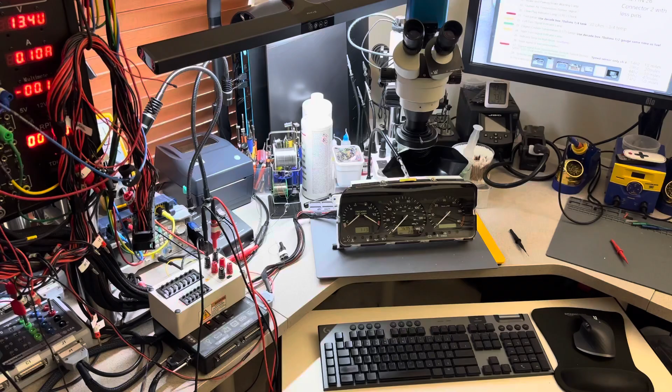All right, this is a private video for you, Lee. Again, I've been testing your instrument cluster for a few hours, since I have other things to do. I'm using the other simulator, but I don't find anything wrong with it. Let me just show you.

I have the battery connected. I'm going to turn the ignition on. I have signals already applied to it, so you will see RPM, speed, and so on. But yeah, as you can see, everything is working good. I don't see anything wrong with anything.

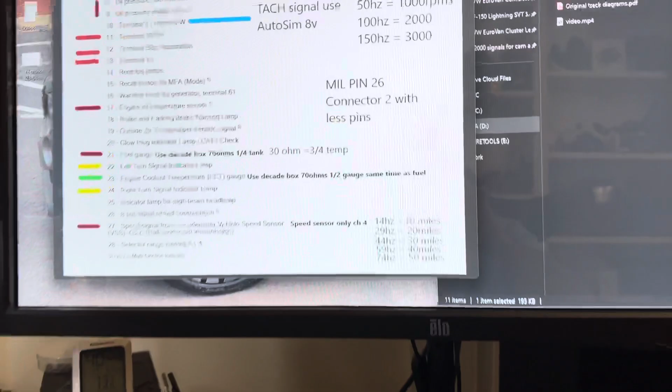I can change the speed, and one thing that I want to show you is all my signals. Just get rid of some in here. Yeah, perfect. So you can see right there the hertz that I give, that changes into mileage. So let's say right now I'm providing around 59 hertz, and that is around 40 miles an hour. So calibration wise, that is perfect. And I've been checking different speeds and it's good.

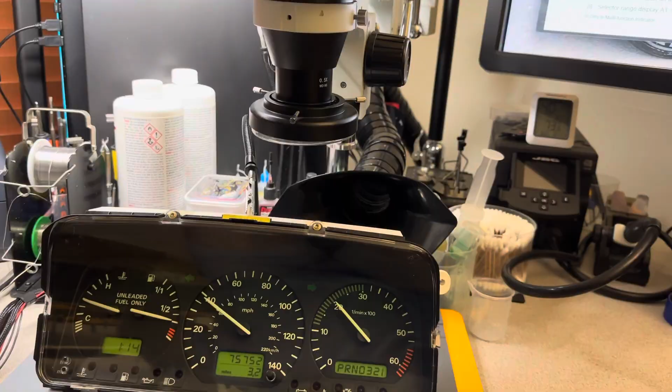Same thing goes for hertz on the RPM. So 50 hertz is 1,000, 100 hertz is 2,000, and so on, right? So I'm right now at 2,000 RPMs. And if we see here, the other tool that I'm using, I'm at 100 hertz. So that is matching the specification. So if I go over to 50, which is 1,000 RPMs, we can see that that is indeed perfect. So again, no problem with the signals.

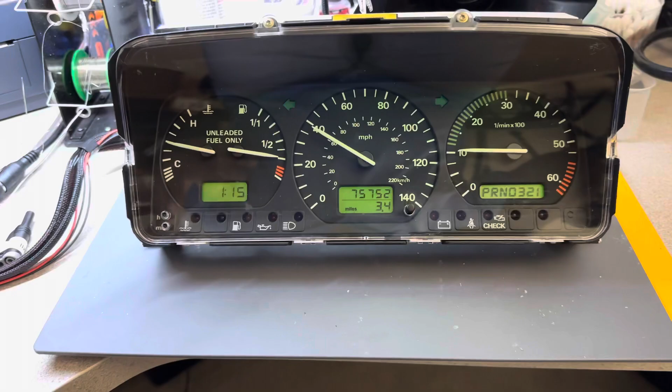I'm going to go down to idle. Idle, like lower RPMs and lower miles per hour, which in this case, the lowest I can go is 14 hertz, and that's 10 miles per hour. I can go down in RPMs, so probably around there. Kind of like mimicking an idle condition, right?

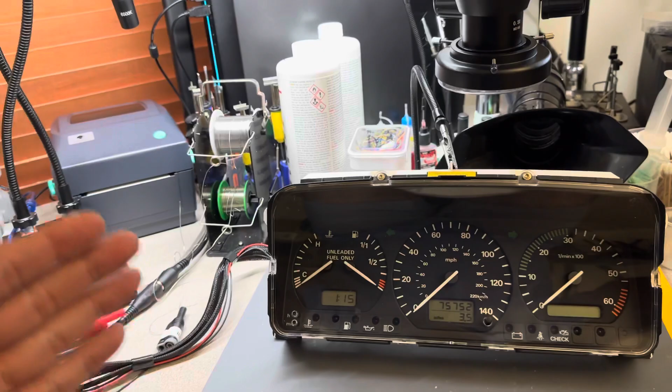I'm going to turn ignition off. All gauges are returning, as you can see, to the rest position. And when I turn ignition on, let's say if I turn this signal off and this signal off as well, let me actually turn all the signals off. You'll see that everything is resting at 0, which is exactly what it should do. I don't have the needles staying up. I don't care how many times I turn the ignition on and off.

If I turn ignition off and battery off, which will not happen in the vehicle, but when I do that, every time I turn this on, you will hear all the stepper motors resetting. Do you hear that? So yeah, it is doing it.

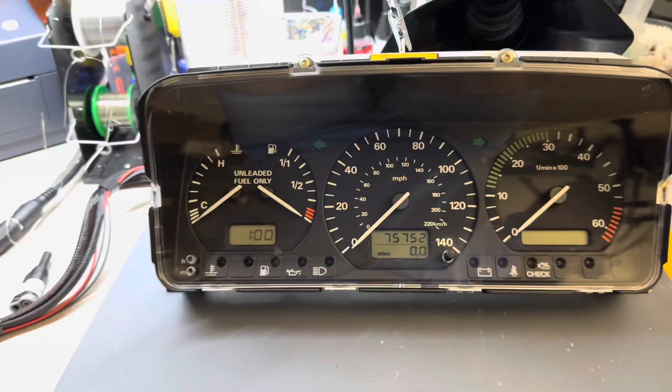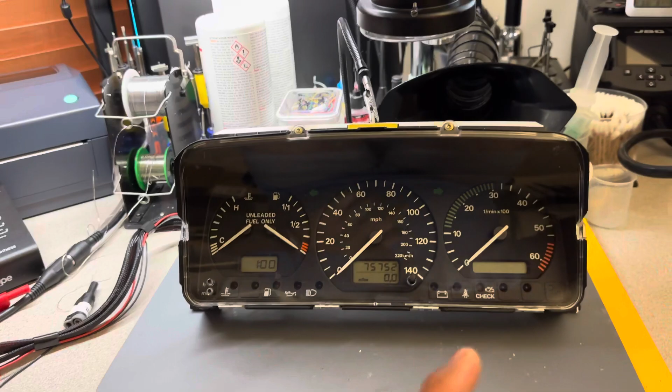Not sure if this is happening on the vehicle, because I saw your video and I've been playing it a couple of times, and I've noticed that when that happens, you turn the ignition on and the needles stay up, like it's missing a battery, it's missing a ground. So again, I will recommend to check the grounds.

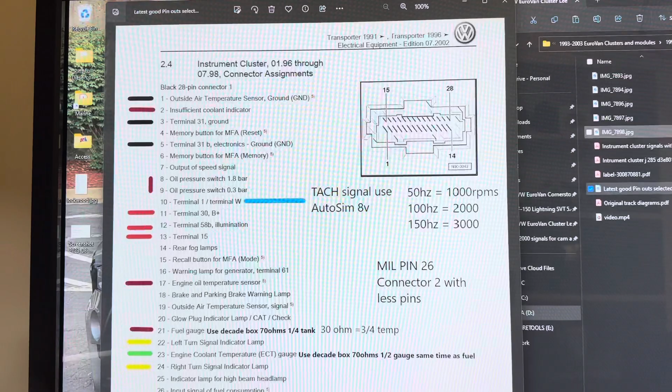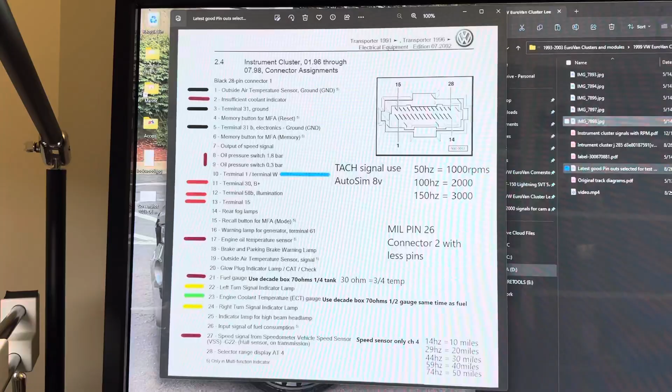I have gathered, and you can see here, all the main grounds that you need. So this is pretty much the pinout that you need for your instrument cluster. Everything is on the connector facing the cluster this way, the connector on this side. It's a 28 pin. And then yes, please check powers and grounds and everything as I have here. It's marked with colors, so you can see a little bit.

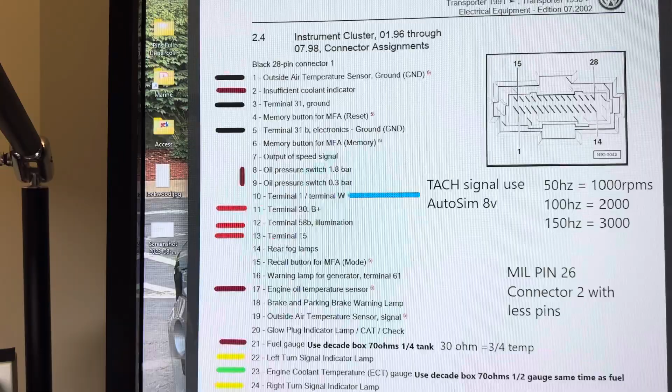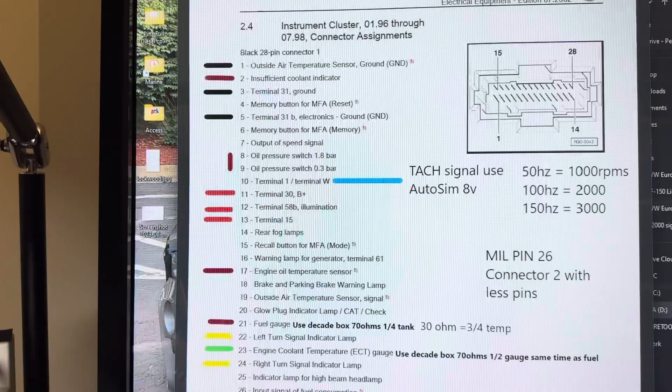Hopefully you can zoom in there, but you can see the main grounds are in black, and red are for power. So we have terminal 30, which is B plus, terminal 58 is for illumination, but it's always good to have that there because it's also a battery power feed for the cluster, and then terminal 15, which is ignition. And the rest are just signals, so they should not affect anything. But again, the instrument cluster is working perfectly every single time in here.

Again, ignition back on. If I provide the signals, so let me go back to temperature. Let me provide the RPMs. I'm going to 50 hertz, so that's 1,000 RPMs. And let me put the speed.

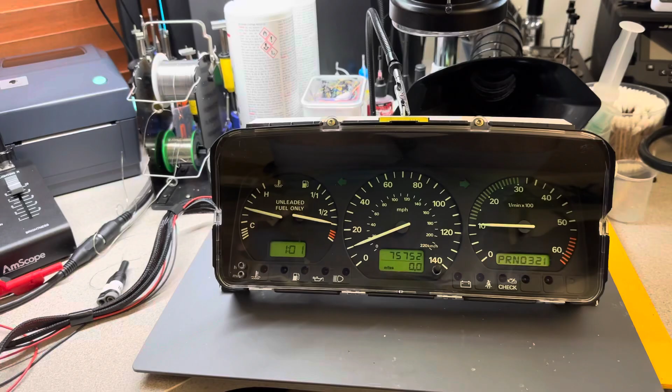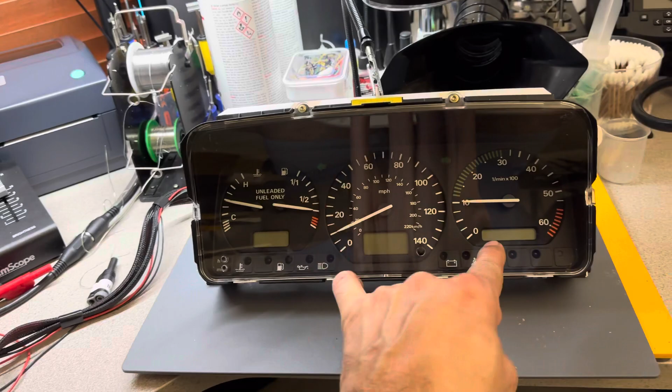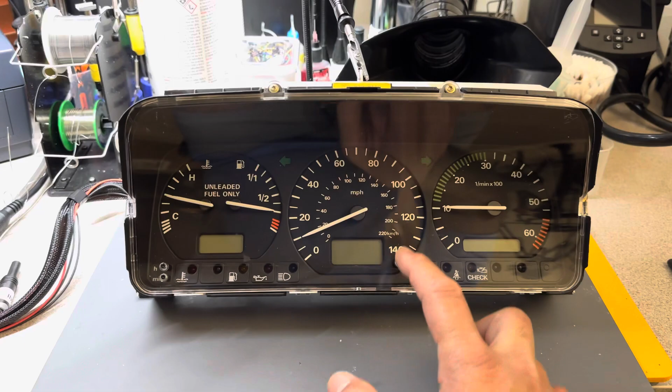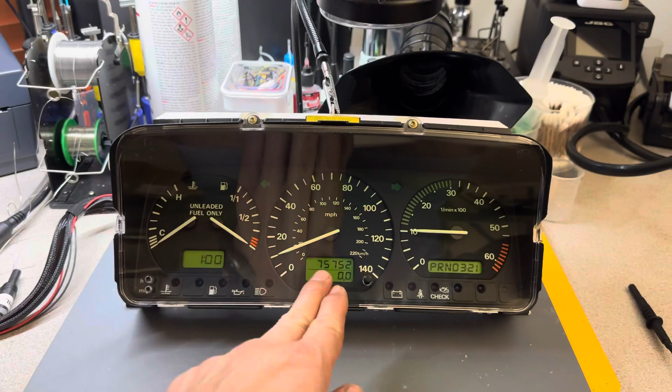If I turn the battery off, like let's say if you lose the battery, and I turn the ignition off, that's where the gauge needles stay. But looking at your video, in your case you're not losing the clock or PRNDL or mileage, because if I turn the ignition back on here, it resets it immediately. And then we have clock, mileage, and PRNDL. And everything is working in there, even though I don't have the battery.

Remember, the battery feed is for the clock to not lose that time, because right now it's at 0 minutes. So it will be reset every single time, and you have to reset the clock. It's the only reason it's in there. But see, if I turn just the ignition off, which is normally what should happen, everything stays lit like this.

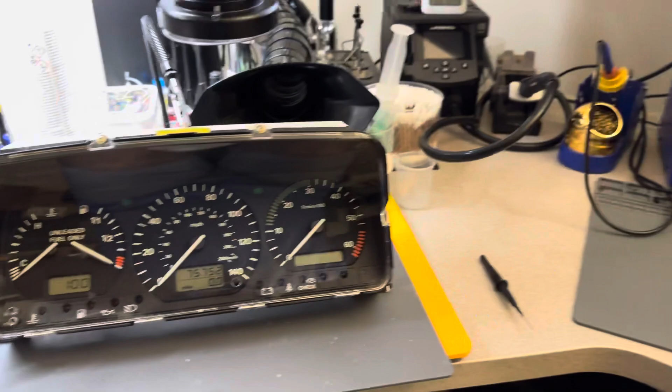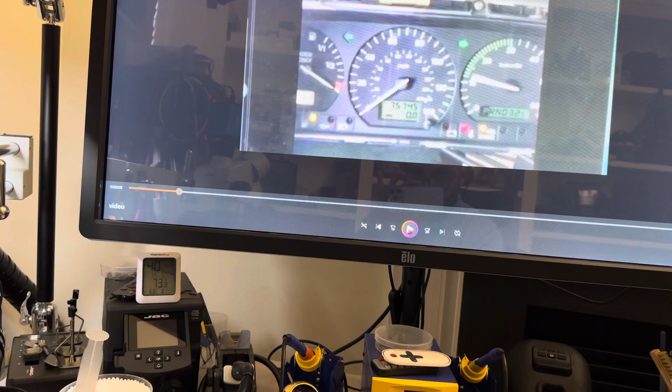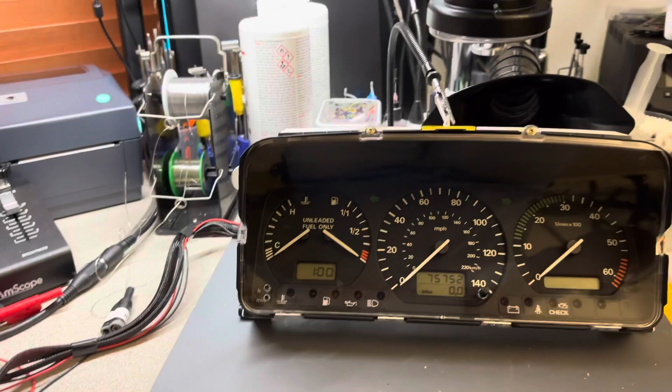Looking at your video, which I had to rotate a little bit because it was sideways for me, I cannot see the clock, so I'm not sure, because it's a little low quality video for me to see. But if you don't have the clock, that means you don't have the battery, or you're missing something else, because this has to come on all the time.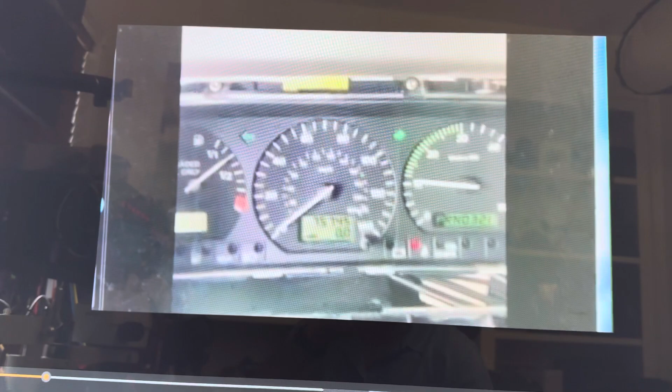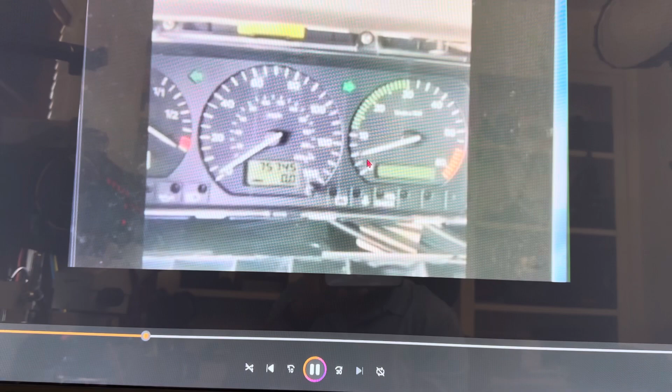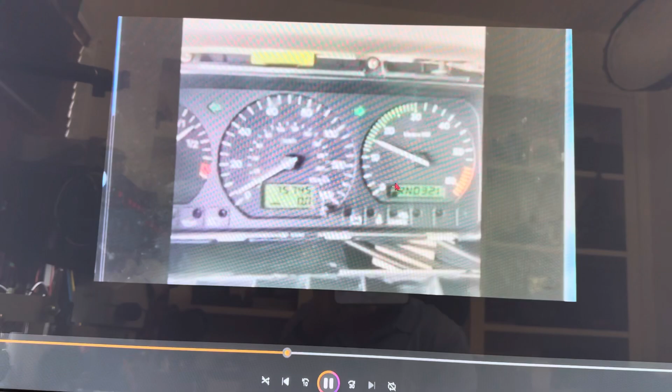You focused on that side, so I lost a little bit, maybe it's just the glare. Not sure if we have anything or not in here. I can see the fuel tank level going up and down, but that's it. I can see that you lost that right there. I can still see RPM. It looks like you were with ignition off, which is okay, so that was normal. I would have liked to see if we have the clock working or not. Because if you're missing one of the powers or one of the grounds, it will start creating these issues, because these clusters are very picky.

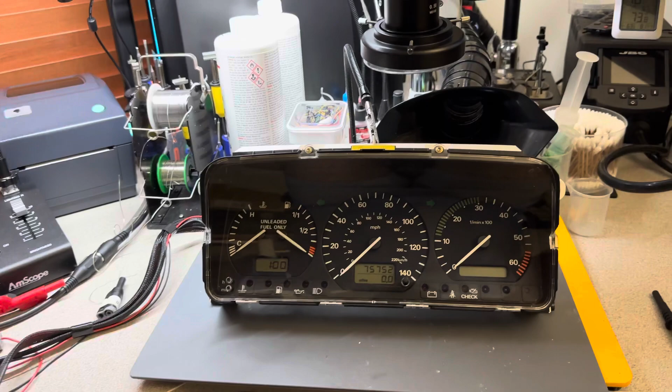Since I am providing everything this cluster needs in here, every single time this is resetting, and it should, if you are connected properly. If for any reason you disconnect the fuse, I'm going to reproduce that. If I lose the battery, this is my main battery power. When I turn this off, the needles will stay, right? Because there was no backup power. But if I power up, they have to go down and reset. If they don't do that, the only situation that can happen is a loose ground or a bad power. You need to do voltage drop tests.

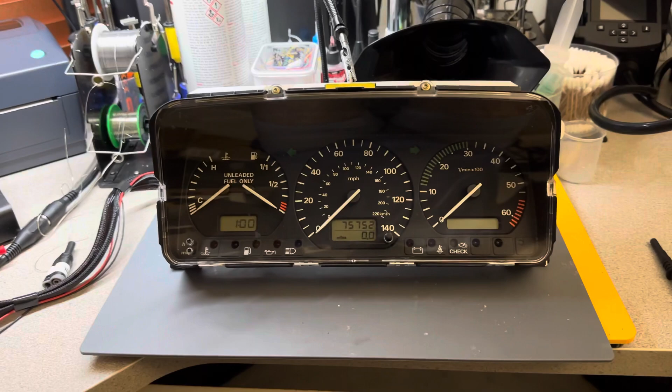All right, Lee, I'm going to keep this private because I already mentioned all this in the first video. I just wanted to reiterate, you can see all the gauges, RPMs and everything are working 100%. I didn't show the RPM in the first video, so I want to show you that indeed everything is working. And I have all the settings that I know I can reproduce every single time.

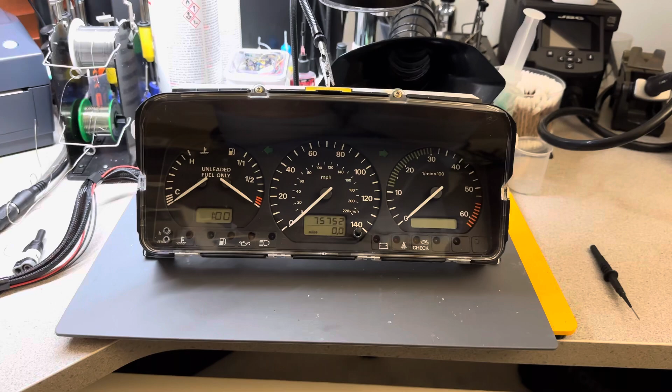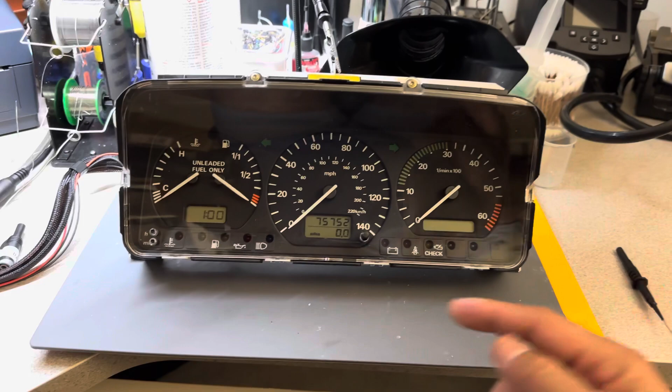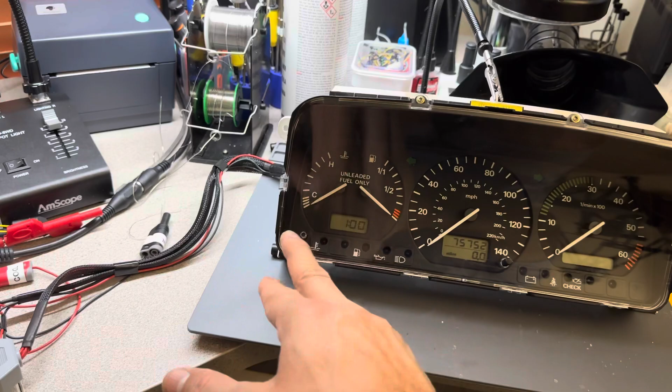Like that, I know if the gauge stepper motor is off, because if I put 50 hertz and this goes to 30, well, it's reading RPM bad, right? Same thing with the speedometer. If I put this at 14 hertz and it goes to 60 miles an hour, then something is wrong. And I have the other settings for coolant and fuel, so I know where the gauges need to be based on resistance.

All right, I hope this is helpful in showing that your cluster is working perfectly, 100%. I will contact you shortly.